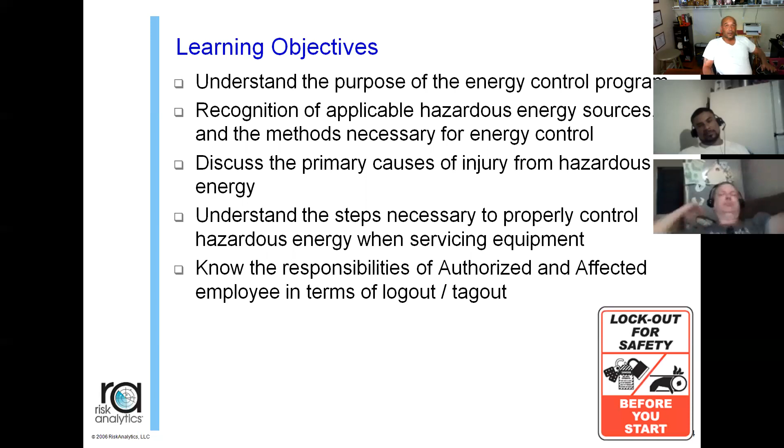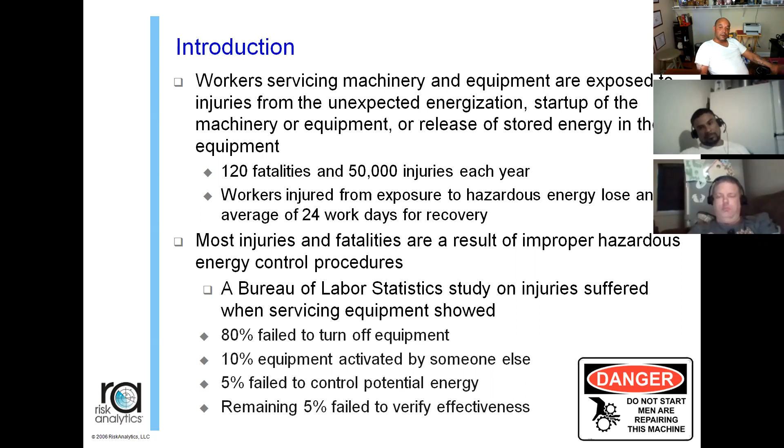A Bureau of Labor Statistics study on injuries suffered when servicing equipment showed 80% failed to turn off equipment, 10% equipment activated by someone else, 5% failed to control potential energy, and the remaining 5% failed to verify effectiveness. So, do not start, men are repairing this machine. So that's the sign that should be anywhere you're working. It's classified as a fatal 5.

So the main causes of lockout tagout injuries, one is failure to stop equipment before servicing. Okay, meaning someone goes in there, opens up a breaker panel, doesn't shut off the main, boom, bam, they get zapped. Okay, failure to disconnect equipment from power source. Failure to dissipate, bleed, neutralize residual energy.

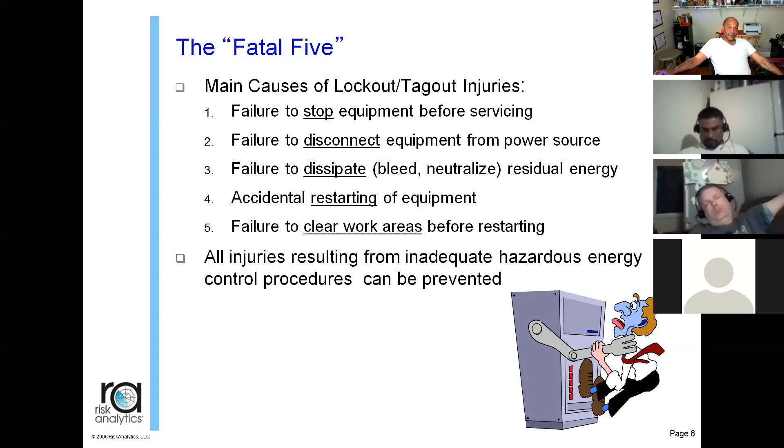Okay, in the HVAC system, you have what's called a capacitor. The way you de-energize a capacitor, you take a screwdriver and you put it across both, and that de-energizes the capacitor, because that can essentially kill you even though the unit is off if it's still energized. So, and failure to clear work areas before restarting. Okay. So all injuries resulting from inadequate hazardous energy control procedures can be prevented.

Types of hazardous energy, you have mechanical, so potential energy and kinetic energy present in a component of a mechanical system. So kinetic energy, possessed by virtue of its own motion. Common injuries are fractures, contusions, lacerations, and amputations. Okay, potential energy, stored by the mechanical system. Common injuries are fractures, contusions, lacerations, and amputations.

Electrical energy as a result of a generated electrical power source or a static source. The common injuries are shock, burns, and electrocution, meaning death. And thermal energy as a result of mechanical work, radiation, chemical reaction, or electrical resistance. Common injuries will be burns.

Let's see the little pictures right here. Okay. I just see the lockout for safety. Okay. You don't see any before you start? You don't see any pictures of a hand with fire or electric? Oh yeah, I see it. The cameras were blocking it. Okay.

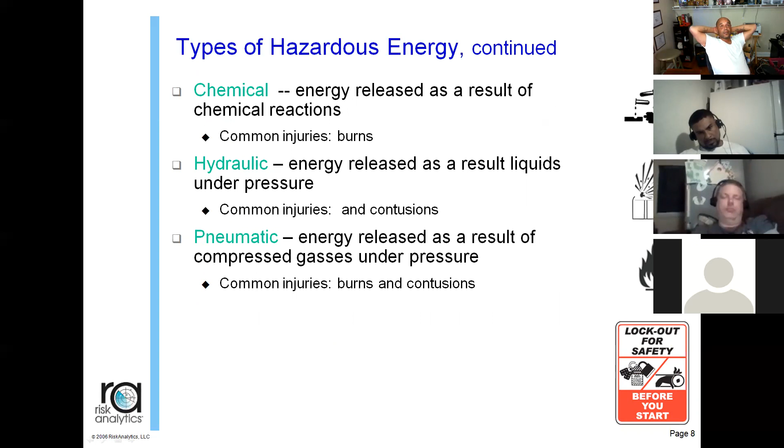So types of hazardous energy. So chemical energy, released as a result of chemical reaction, and the common injury will be burns. Hydraulic energy, released as a result of liquid under pressure, common injuries are contusions. Pneumatic energy, released as a result of compressed gases under pressure, and common injuries will be burns and contusions.

So you guys are probably asking yourselves, why are we going over this? So I know why. If we're on a job site and something happens, we will be able to determine what exactly caused the injury, and we can report it to 911, so they know how to come prepared. Okay. So let's discuss what is lockout tagout.

So lockout tagout is a hazard avoidance technique used to prevent energy from being accidentally released during the servicing of equipment. The lockout-tagout standard requires the adoption and implementation of written practices and procedures to, one, shut down equipment, very important, isolate it from its energy source or sources, and prevent the release of potentially hazardous energy while maintenance and servicing activities are being performed.

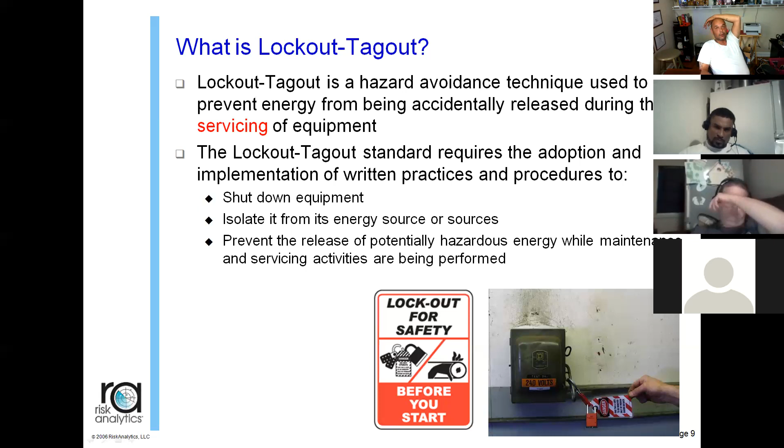Energy control program, 3 core components. Component number 1, energy control procedures that detail the scope, purpose, authorization, rules, and techniques to be utilized for the control of hazardous energy. Periodic inspections of the energy control procedures to ensure that the procedure and the requirements are being followed. Employee training and ongoing retraining to ensure that the energy control program is understood. So we have a written procedure, inspection, and training.

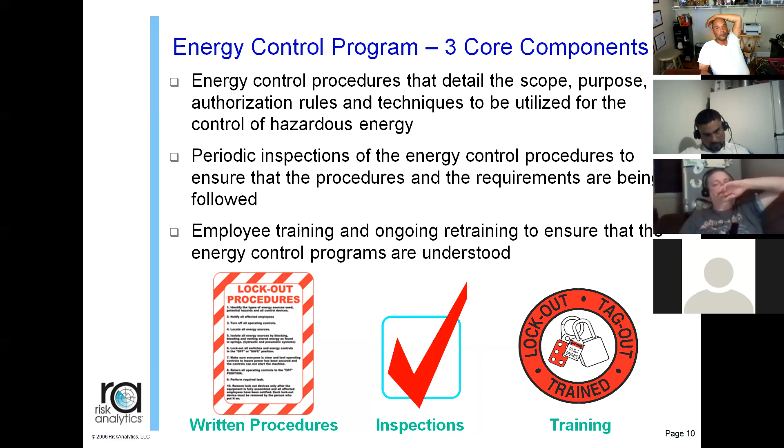Lockout-tagout procedures are required if a worker must remove or bypass machine guards or other safety devices, or a worker is required to place any part of their body into a point of operation or into the danger zone associated with the machine's operation.

Examples of activities where proper lockout-tagout procedures will be required include installing, lubricating, cleaning and unjamming machines or equipment, and making adjustments or tool changes. Okay?

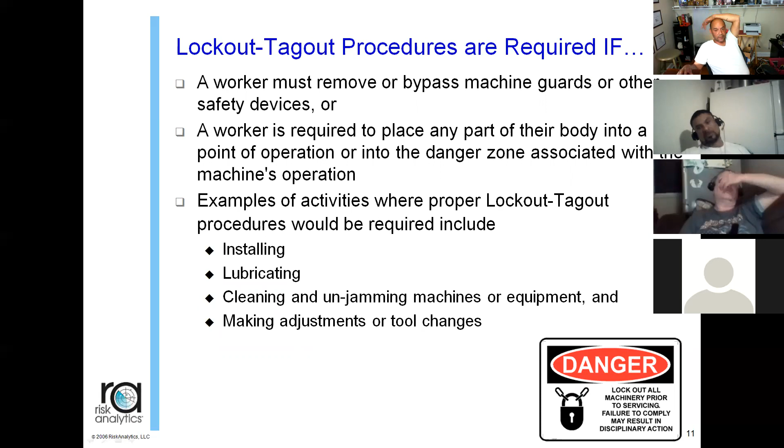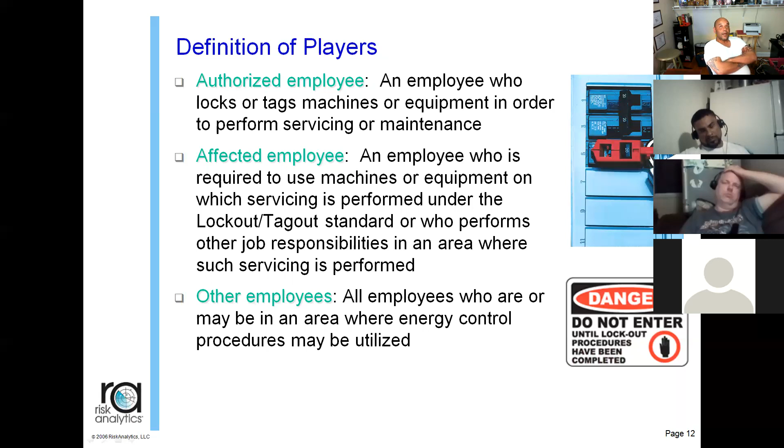So, definitions of players. An authorized employee is an employee who locks or tags machines or equipment in order to perform servicing or maintenance. An affected employee is an employee who is required to use machines or equipment on which servicing is performed under the lockout-tagout standard, or who performs other job responsibilities in an area where such servicing is performed.

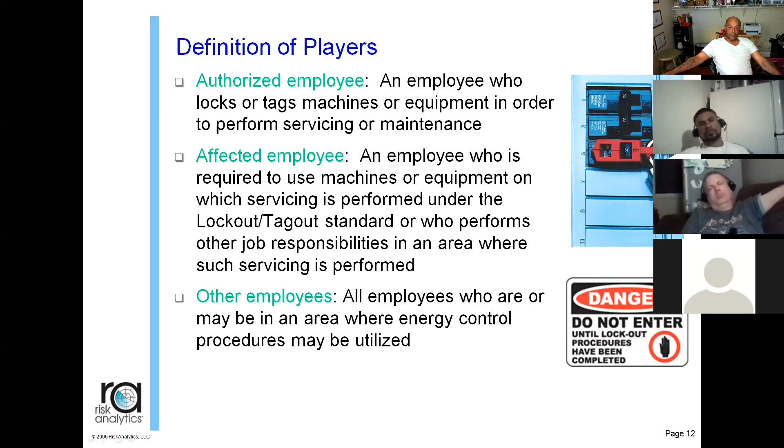Now the other employee: all employees who are or may be in the area where energy control procedures may be utilized. Okay, we have three key players when it comes to lockout-tagout. So let's discuss the roles and responsibilities of each player.

The responsibility of the authorized employee is to identify all energy sources, notify all affected employees in the area of work, shut down the equipment at the operating controls, isolate all energy sources to the equipment, lock and tag all isolating devices, dissipate all stored or residual energy sources, verify the isolation, remove the lock and tag when repair and testing are complete, and notify all affected employees that the lock and tag were removed.

I have a question. Can you go back, please? Okay, so with dissipate, in the fatal 5 it said, in parentheses, bleed and neutralize. What I remember from the last time we spoke about electricity is that when you bleed, the current is drained completely from whatever it is we're going to be working on, right? Correct.

Even though I'm not on site, I would like to know, is that done when you're working with big machinery? Do you wait a certain period of time, or how does that work? No, this is how it works. Let's use an HVAC system, a split unit inside the house. It has a furnace and an air conditioner. There's something called a capacitor.

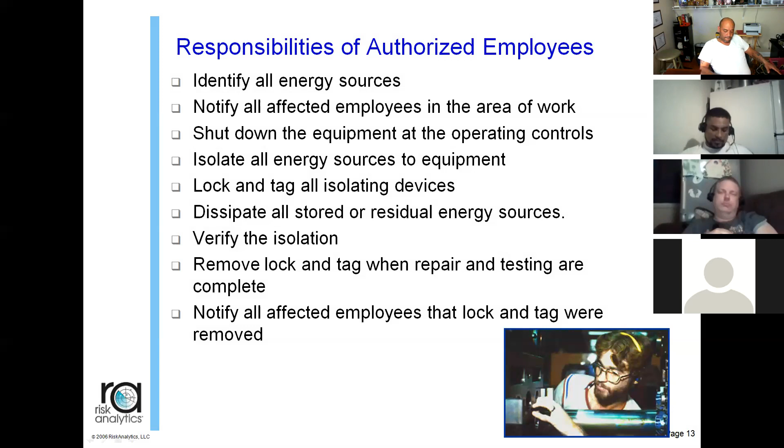So it's like a backup battery for the units. Okay. And big machinery has big capacitors. So it's pretty much like a fail-safe. If something happens, it still has a little bit of juice to try to keep the machine going until it drains out. All right. Got it. Good. Moving on. Thank you.

Responsibilities of affected employees: never interfere or tamper with the lock or tag. Stay clear of the area as much as possible. Never attempt to assist. Report any unusual situation or unsafe condition to your supervisor. Okay?

So let's go back here. Whenever someone is working on an electrical system, you have 3 players. The first player is the one doing everything: lockout, tagout, de-energizing the system. The affected employee's job is to be there but not interfere, because if something happens, you have to have that extra person. It's just like somebody to keep watch, right? Correct, like a spotter.

So they're not to do anything or put their hands on anything. Their job is simply to be there and watch at a distance.

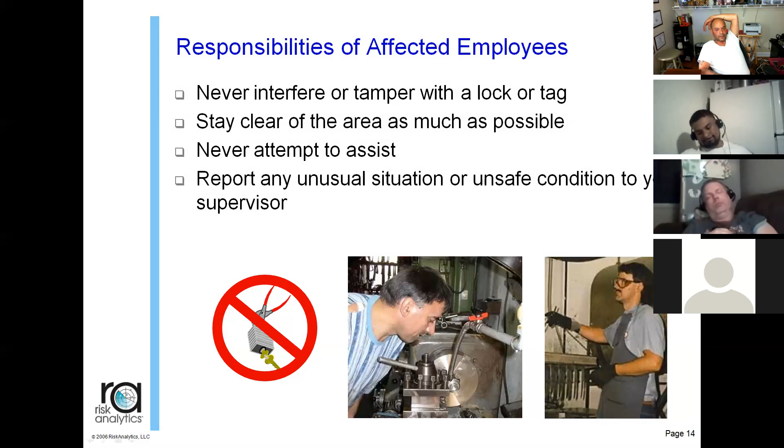Let's discuss some energy isolation devices: a mechanical device that physically prevents the transmission or release of energy, such as circuit breakers, disconnect switches, line valves, slide gates, blind flanges. Note, push buttons, selector switches, and other control circuit type devices are not energy isolating devices. Okay, you understand what that means?

Okay, moving on. It's just like a safety valve or safety. Huh? It's just like a safe trigger, a safety button, just like something that'll stop immediately. Not when it, like, the definition is... Oh, self-explanatory. So what it's saying is that a push button, a selector switch, and other control circuit type is a non-energy isolating device. So just because you push the button doesn't mean that you shut the power down. Understand? Okay. Step one of shutting down the whole system. Okay, got it.

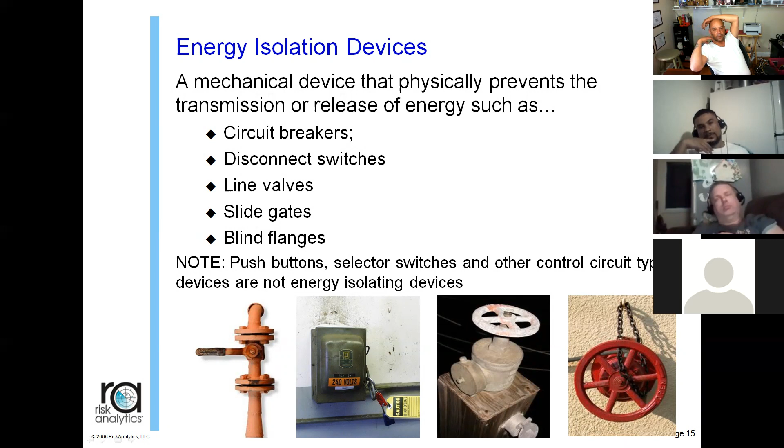All right, so let's look at different types of lockout devices. Alex, you asked this question last time. Remember, what difference is? So we have the key and combination lock. Okay, the key and combination lock is pretty much self-explanatory. This is your key and combination. Okay, and this is your key and lock. Okay, you have your ball valve locks. You guys see the mouse? Mm-hmm. Okay. Actually, no, sorry. The ball valve is here.

These are gate valves. So you have your gate valve locks here. You have your group lockout hasp, which is here. Then you have your circuit breaker locks and then valve hand wheel cover. So here is where you have your ball valves, your gate valve, and your valve hand wheel cover. Here's where you will have your combination lock, and here's where you will have your key and lock. Okay, moving on.

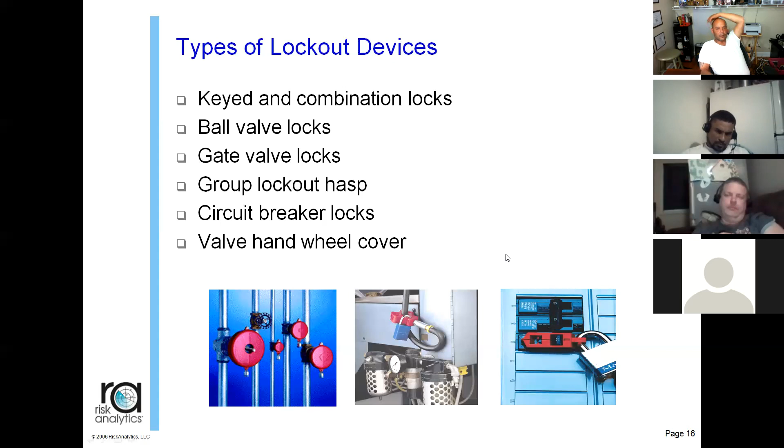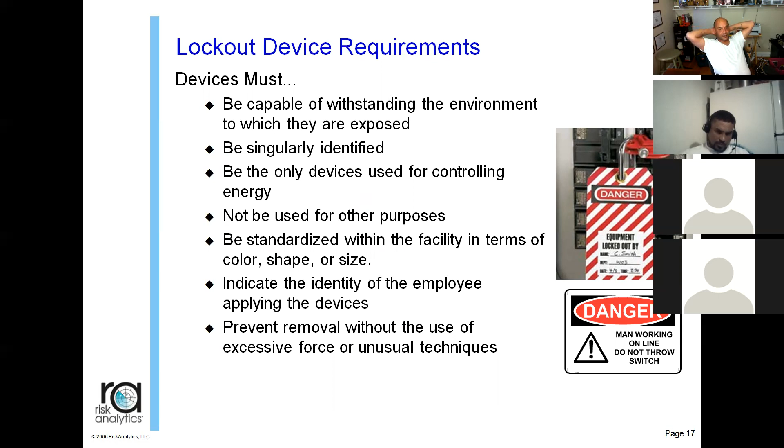So, tagout requirements. Tagouts must be capable of withstanding the environment to which they're exposed, able to withstand corrosive environments such as areas where acid and alkali chemicals are handled and stored. Standardized in print and format, substantial in order to prevent inadvertent or accidental removal, able to be attachable by hand, self-locking, and non-releasable with a minimum unlocking strength of no less than 50 pounds.

Inclusive of a legend such as DO NOT START, DO NOT OPEN, DO NOT CLOSE, DO NOT ENERGIZE, DO NOT OPERATE. Okay, you notice everything is written in caps, meaning you are being yelled at by that sticker.

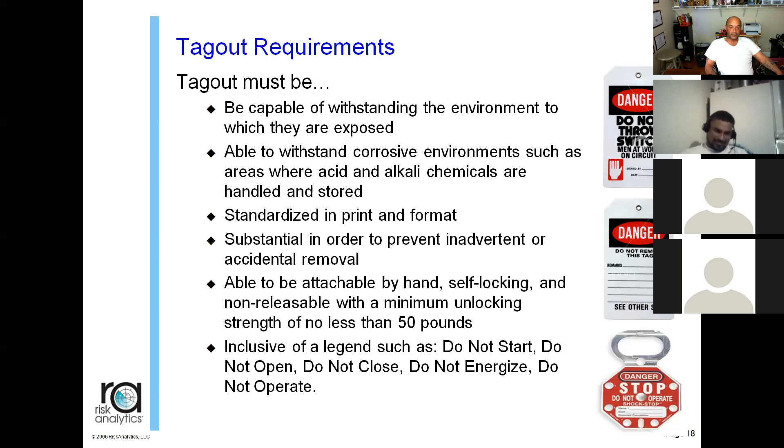Okay, so lockout versus tagout. If an energy isolating device is capable of being locked out, a lockout system must be used. So anytime you're locking out a system, you have to use a lockout system. If an energy isolating device is not capable of being locked, tagout may be used provided training and more rigorous periodic inspections are implemented. So if something is able to be locked, you go ahead and you lock it. If something is not able to be locked, you go ahead and you tag it. Make sense?

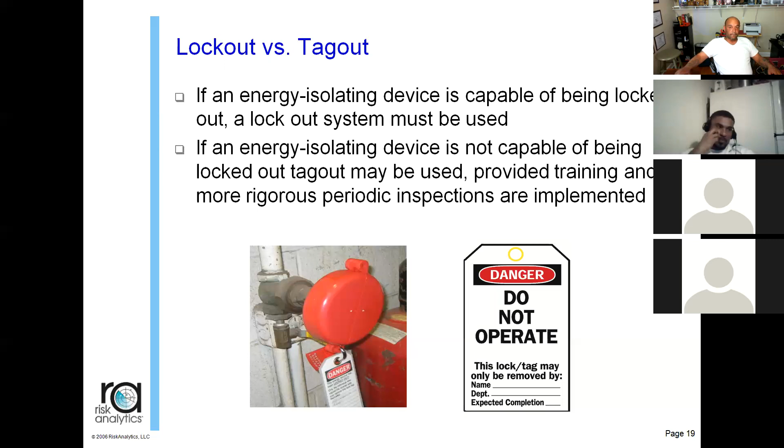Mm-hmm. So, general energy control procedure. Step one, identify the energy source. Step two, notify others. Step three, shut down the equipment. Step four, isolate equipment. Step five, lockout, tagout equipment. Step six, release stored energy. Seven, verify isolation. Eight, service equipment. Nine, release from lockout, tagout, known as LOTO. Okay? Any questions on that?

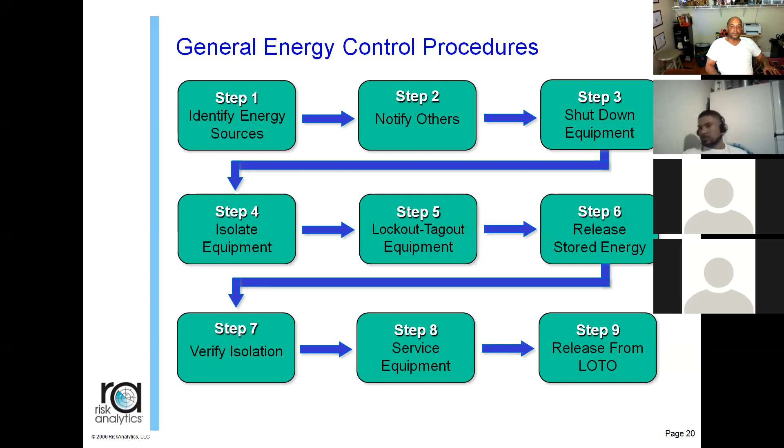So, general energy control procedures. Step one, identify energy source. You have to understand the types and magnitudes of the specific energy associated with equipment being serviced, hazards of energy being controlled, and method or means to control the energy. Identify all energy sources feeding the equipment, including potential energy. Identify and obtain the appropriate control devices. Clarify any questionable identification of energy source before proceeding. So that is step one, identify energy sources. Okay?

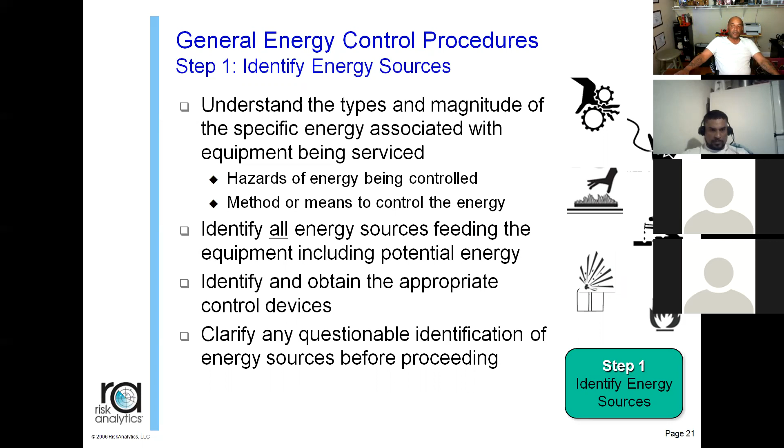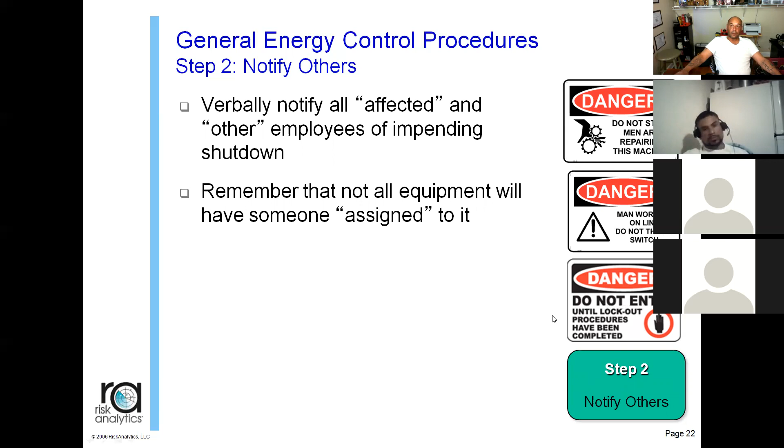We're moving on to step two. Step two is notify others. Verbally notify all affected and other employees of impending shutdown. Remember that not all equipment will have someone assigned to it. That's step two, notify others. And again, you use your notices. Step three of the process is shut down the equipment. You're going to use standard equipment operating procedures to shut down the equipment. Push stop button, open toggle switch, and close the valve. Okay?

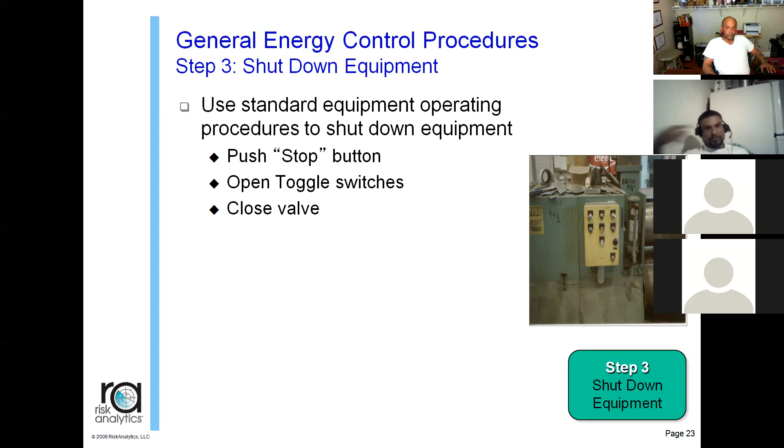And then step four, you need to isolate the equipment. Operate all energy isolating devices so that the equipment is isolated from its energy source. Be sure to isolate all energy sources, primary supplies, any secondary energy sources. So that's step four of the process. Step five is the lockout tagout. A lock or tag must be applied to each device. Quick question.

Yeah. Okay, so on the previous one, that's when the bleeding would be done, right? That's when you would make sure that... No? This is isolating. Isolating means contain it. Oh. All right.

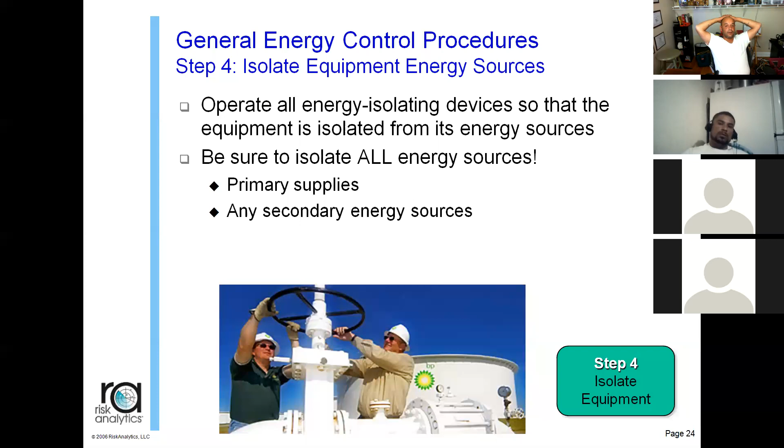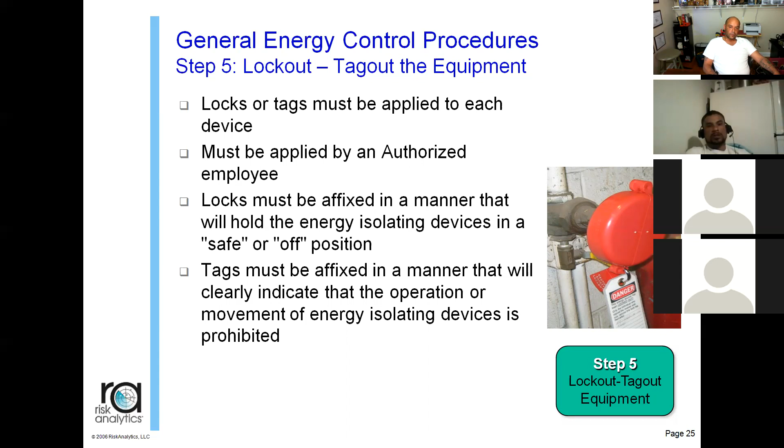The actual lockout tagout, just to make sure that you lock the power source from the equipment you're going to be using, and making sure you label it that it shouldn't be turned back on because it's under maintenance. Got you. Right. So, Alex, why don't you read step 6?

Yeah, sure. It's general energy control procedures. Step 6, release stored energy. First bullet is, gotta ensure that all potential or residual energy is controlled. We have to block or brace springs and any elevated parts that could fall due to gravity. Relieve trapped system pressure. Bleed lines and vent valves to drain fluids and gases. Discharge capacitors. If stored energy can reaccumulate, monitor it to make sure it stays below hazardous levels.

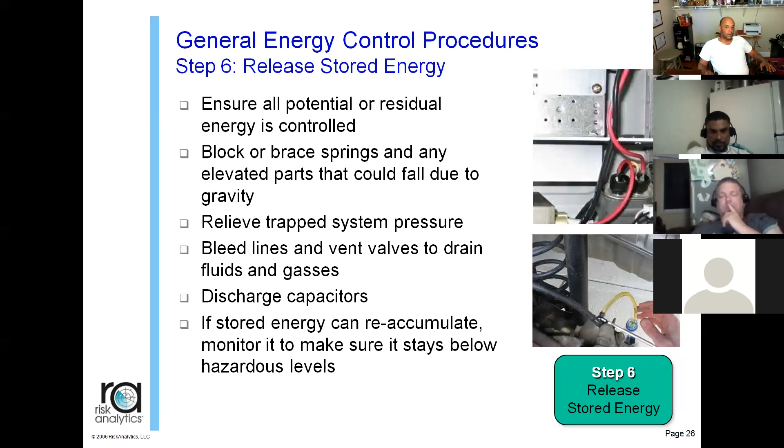Okay. What is step 6 known as? Release stored energy. Correct. Okay. So, Christian, why don't you go ahead and read step 7? All right. Step 7 is verify isolation.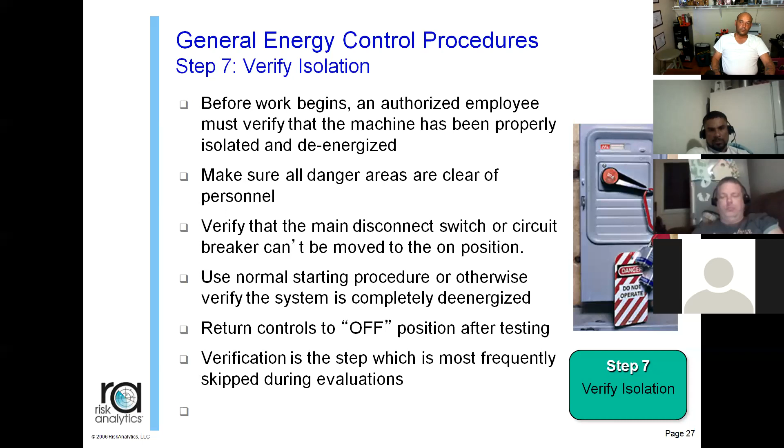So pretty much you just want to make sure that there's no power going through your unit, and just make sure that everything is off. All about safety, having safety procedures. Right. Thank you. John, why don't you take step 8? Service equipment. Complete required service work according to manufacturer's recommendations. Avoid doing anything that could potentially reactivate the equipment. Do not bypass the lockout if installing new piping or wiring.

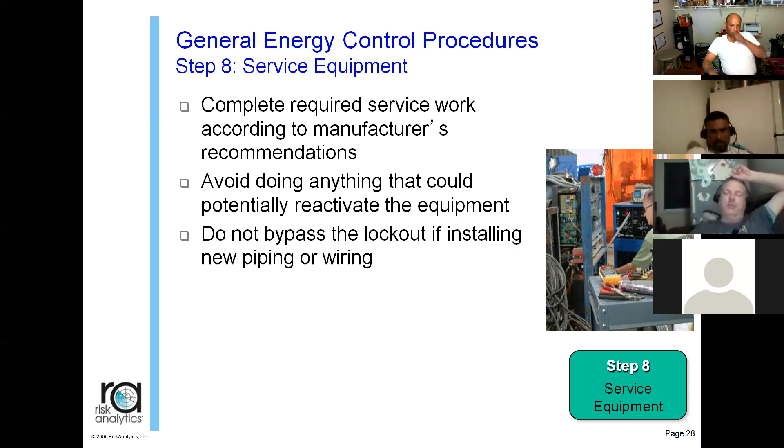Okay, so what does that mean to you? It means service the equipment. Once you're locked out and tagged out, and you're ready to do it, you need to get the job done so that your plant or your project can get back into working order as quickly as possible. Thank you. All right, so step 9. So this is your final step, okay? Release from lockout-tagout, known as LOTO.

Okay, so you inspect the work area to ensure that all tools and spare parts have been removed and that all of the equipment components are operationally intact. Replace all machine guards, ensure that all employees have been safely positioned or have cleared the area. Each lockout-tagout device must be removed from the energy isolating device by the employee who applied the device. Again, by the employee who installed the device, okay? Notify affected and other employees that the lockout-tagout device has been removed before the equipment is started, okay?

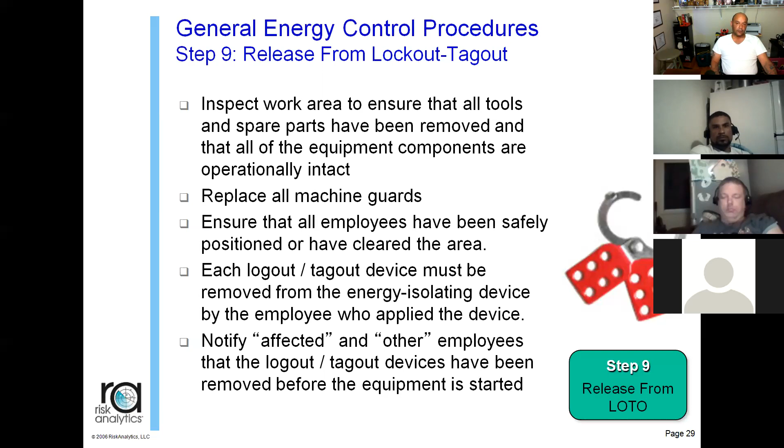So those are your steps on lockout-tagouts. So regardless, let's say there's 3 authorized employees, because they can all do it. The same person who placed the lockout tagout, that's the same exact person that needs to do the LOTO release. Correct. Regardless if anybody else is qualified or trained or what have you. Correct. Only the person who applied the device. All right? Gotcha.

All right, so general energy control, special circumstances for release testing. Okay, so the lockout-tagout device may be removed temporarily to test and or reposition the equipment under the following procedure. Equipment must be cleared of tools and materials. Employees must be removed from the machine or the equipment area, and the lockout-tagout device may then be removed. Authorized employees may then energize and test or position the equipment. Following testing or positioning, the system must be de-energized and energy control measures reapplied. Okay? Start all over again. Correct.

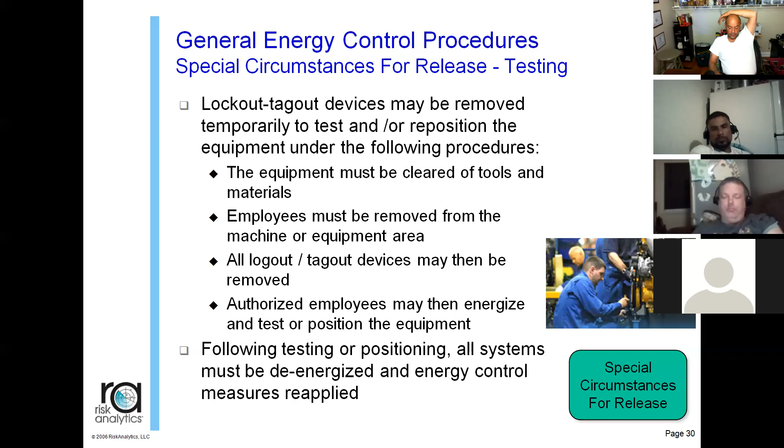So, to answer your question, Alex, about authorized employee: under circumstances for release will be a shift change. Okay? So if servicing lasts more than one shift, Lockout-Tagout protection must not be interrupted. And if the authorized employee who applied the LOTO device is not available to remove it, the device can be removed only in an emergency and only under direction of a supervisor. Must verify the authorized employee is not in the facility.

Must make all reasonable effort to contact the employee who applied the device, and must ensure that the authorized employee knows the LOTO device has been removed. And that's the only way that someone can remove the LOTO. So it's only when they're doing a shift change that it can be done. Other than that, it won't happen.

So what's the reason for the tag in Lockout-Tagout? Let's say Nelson's working on something, and the whistle goes, it's time for him to go home. He's going to walk up to me at shift change and let me know what's going on in the factory. Walk me over to his tag. He's going to sign out his tag, give me his key, and I'm going to sign myself onto his tag. Okay. So that's my tag now.

That's why it's tagged, not just locked out. So it's handing over the keys. Yup, exactly. That way someone can say, okay, Nelson started this, John finished it. Only if that employee is off the facility. If that employee is still in the facility in a meeting, then he is the only one authorized to remove that. Right. Only if they're going to leave the premises does this occur.

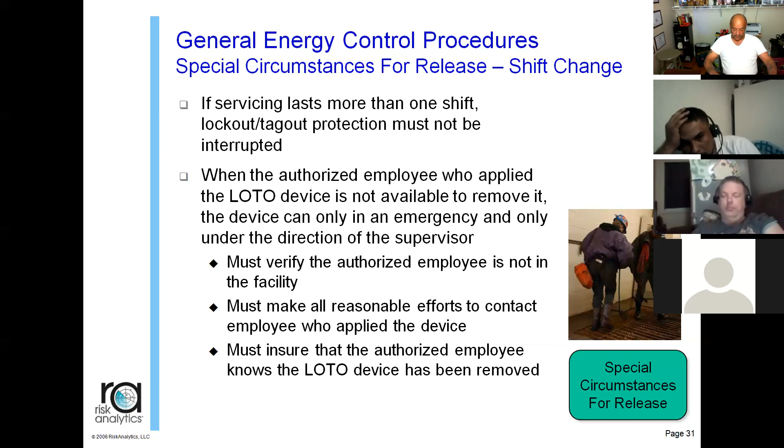So let's talk about group lockout tagout. A group lockout tagout must afford protection for each employee equivalent to that provided by a personal lockout or tagout device. Authorized employees must affix a personal lockout tagout when work begins and remove it when work is completed. The group must designate a single authorized employee to serve as overall supervisor.

So let's just say there's 3 of us, okay? There are to be 3 locks on that lockout. 3, not 2, but 3. Everyone, the 3, must remove those locks. 1 person cannot remove those 3 locks. Now I understand it's going to be under a special circumstance, but no, that's not a special circumstance. That is a group lockout tagout. Okay? So I'm going to read it again.

Group lockout tagout must afford protection for each employee equivalent to that provided by a personal lockout or tagout device. Each authorized employee must affix a personal lockout tagout when work begins and remove it when work is completed. And the group must designate a single authorized employee to serve as overall supervisor.

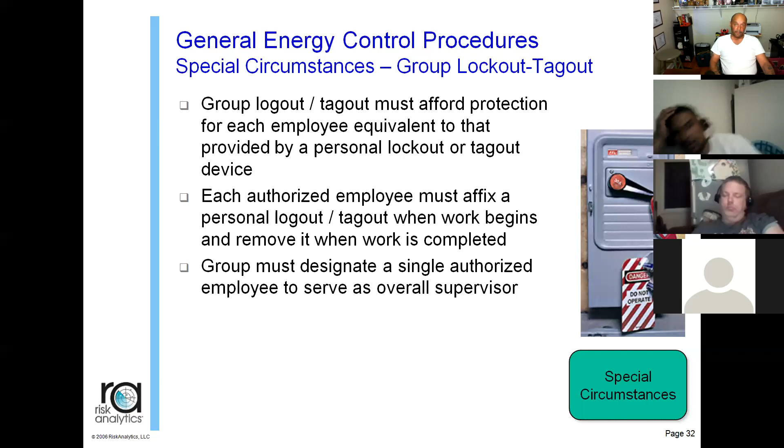So let's summarize. Alex, read the first one. I was about to say that. Okay, so lockout tagout prevents energy from accidentally being released while a machine or equipment is being serviced. Okay. John, number 2. There are 6 types of hazardous energy common in most work environments: mechanical, electrical, thermal, chemical, hydraulic, and pneumatic.

Christian, read number 3. All right. Most injuries and fatalities are a result of improper hazardous energy control procedures. So, like lockout tagout, make sure your things are safe, prevent injuries or deaths. If an energy isolating device is capable of being locked out, a lockout system must be used. Okay.

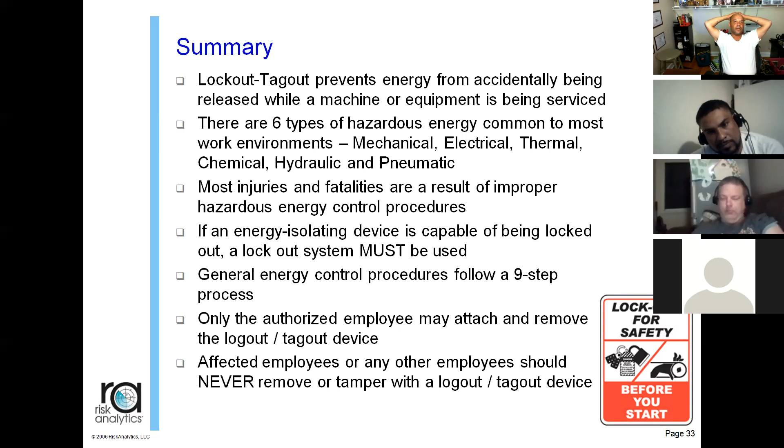General energy control procedures follow a 9-step process. Does everybody remember the 9-step process? I remember the process. I don't remember each one, but I remember the process. Should have been taking notes, guys. Affected employees or any other employees should never remove or tamper with a lockout-tagout device.

Okay? So this concludes our lockout-tagout. Hope you guys learned more about it, especially Alex, because he was pretty much asking about it.